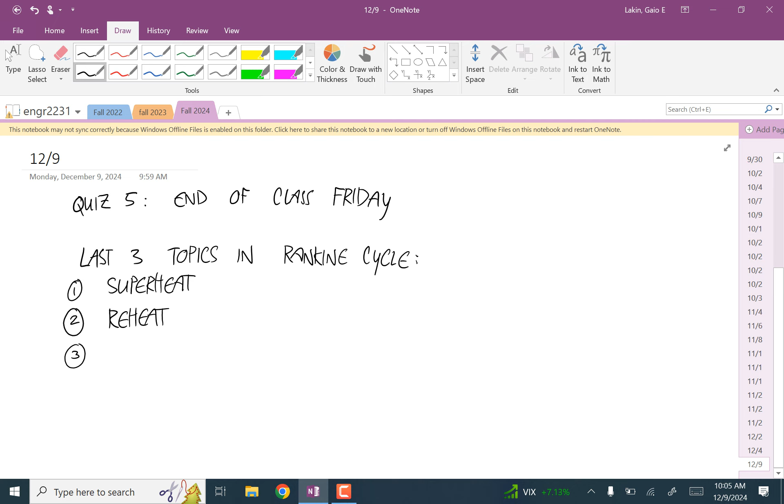Irreversibilities. So anyone remember what are the 2 things that make a process isentropic? This is kind of important. Q dot equal to 0? Yeah, so no heat transfer into or out of the system. And then the other thing is it has to be internally reversible. So this is saying those 2 processes that we think of as having no irreversibilities, how do we introduce those to make it more realistic? That's what the last one is.

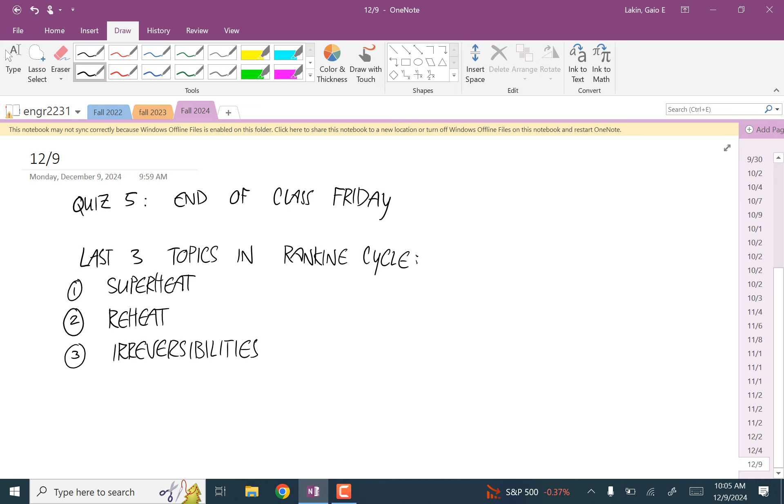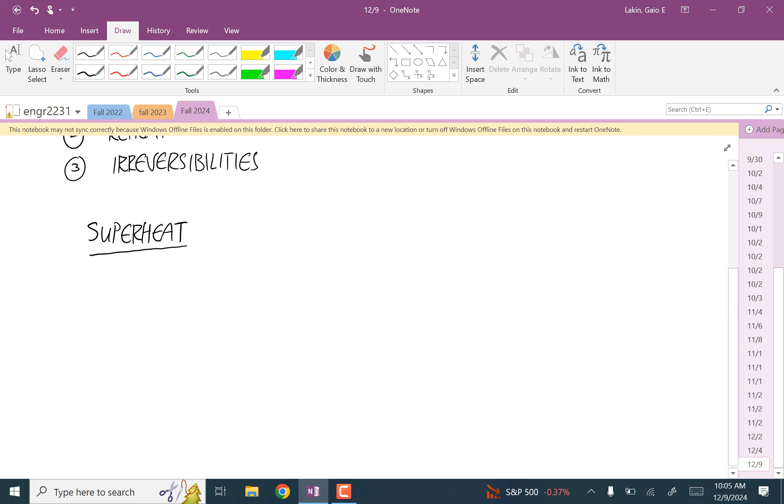Okay, so superheat. If you draw the vapor dome, we're used to state 1 being here for the ideal Rankine cycle. So we're used to it being a saturated vapor. But if you keep pumping up the temperature past that point, remember we're treating the boiler, or we're going to call it a steam generator now, as isobaric. And so if you keep increasing the temperature at that same pressure, you go from a saturated vapor and turn it into a superheated vapor. And so our state 1 is actually here now. Everything else looks the same.

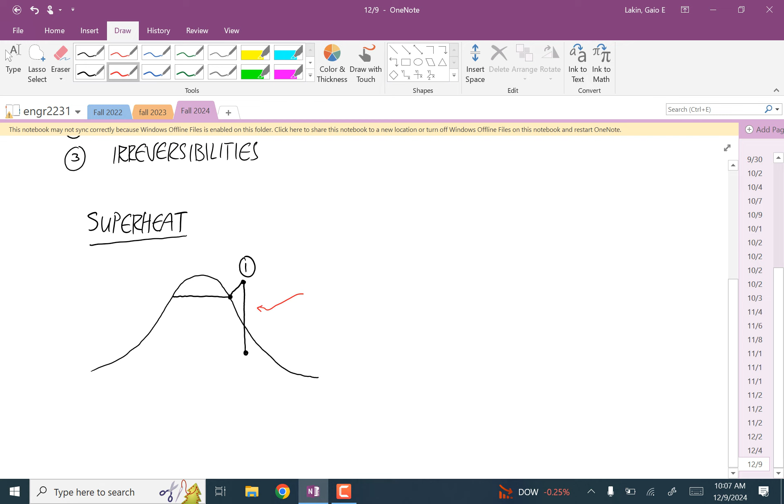We're still going to assume that this is isentropic. Our state 2 is down here. Our state 3, and between states 2 and 3 is an isobaric condenser. And then from 3 to 4 is like this, and this is an isentropic pump. And then 4 to 1 is this whole thing, and that's isobaric.

Once we get past the saturation, we call this a steam generator because the mechanics of it are a little different to get past saturated vapor.

Okay, so what's the purpose of doing this? Why would you do this? We talked about it in passing a long time ago. Because you can get a lot of energy without having to change the temperature.

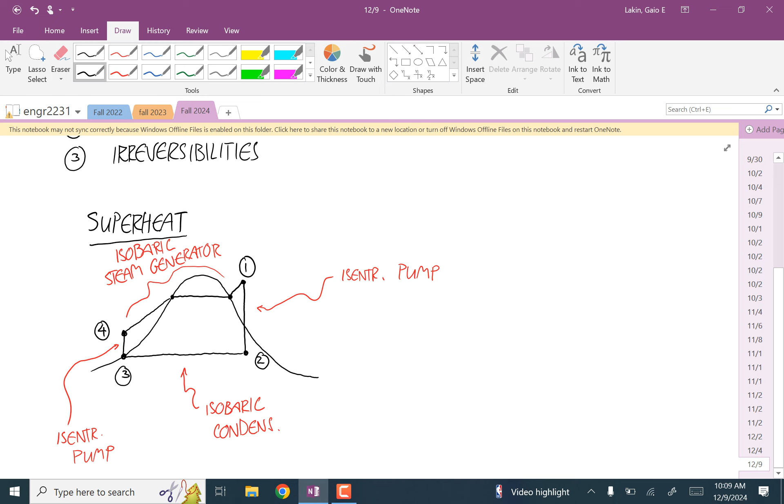That's actually what you get during this, like inside the vapor dome, that temperature, because the vertical is the temperature. But what you get, remember that when we talked about the ideal efficiency of the Rankine cycle, we saw that the higher the pressure and the higher the temperature you have going into the turbine, coming out of the steam generator, the more efficiency you get. And so that's what's happening here. You're just getting more efficiency as you go to a higher pressure and temperature.

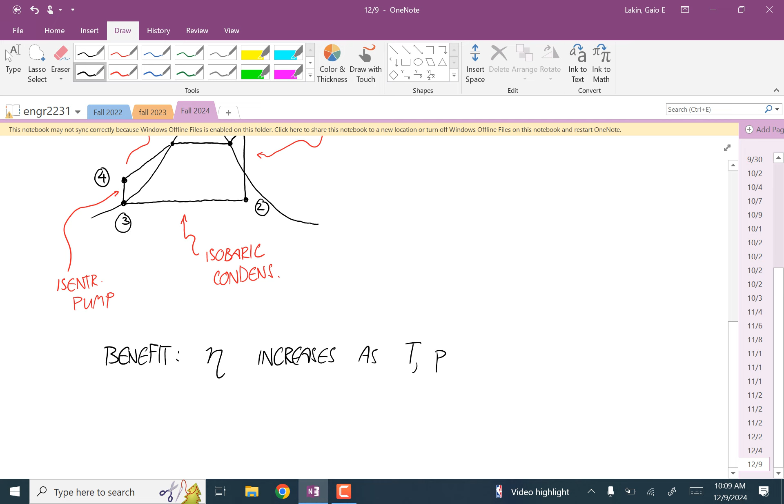So the benefit is that efficiency increases as temperature and pressure at the steam generator increase.

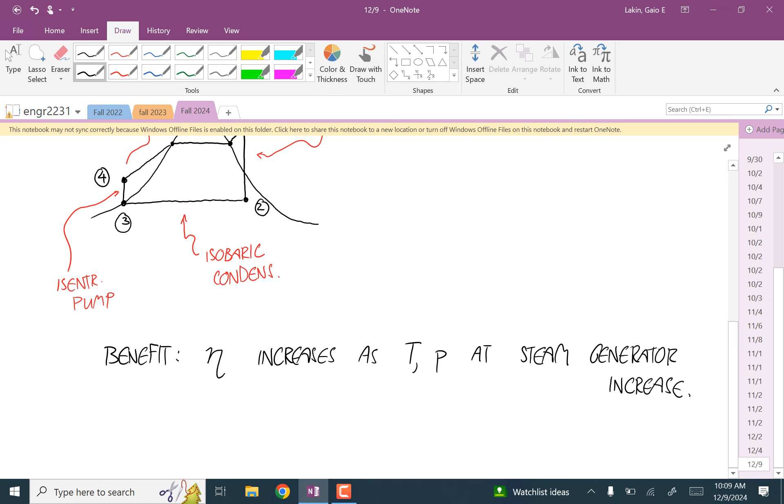Temperature and pressure? Yeah, so either one or the other, or both. Sure, so like higher enthalpy. Right or no? Higher enthalpy. So yes, I guess if you think of that as an ideal gas, that is what would happen there.

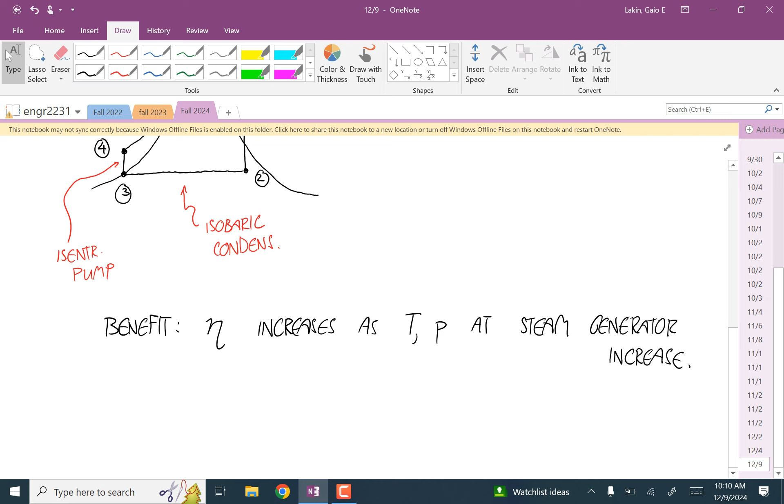Okay, and so how does the calculation change? Nothing changes in the calculation really. Because it's exchanging enthalpy for fluid speed? Is that it? Yeah, I guess what you're really doing in the turbine is exchanging... well, yeah, you're using that enthalpy and turning it into work. So you're exchanging enthalpy for W dot.

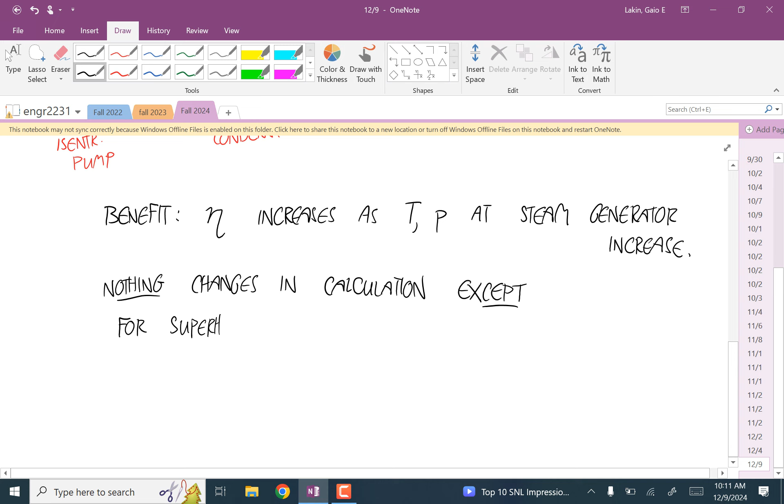Nothing changes in the calculation except now that you have a superheated vapor, now you need two properties to look up any other properties.

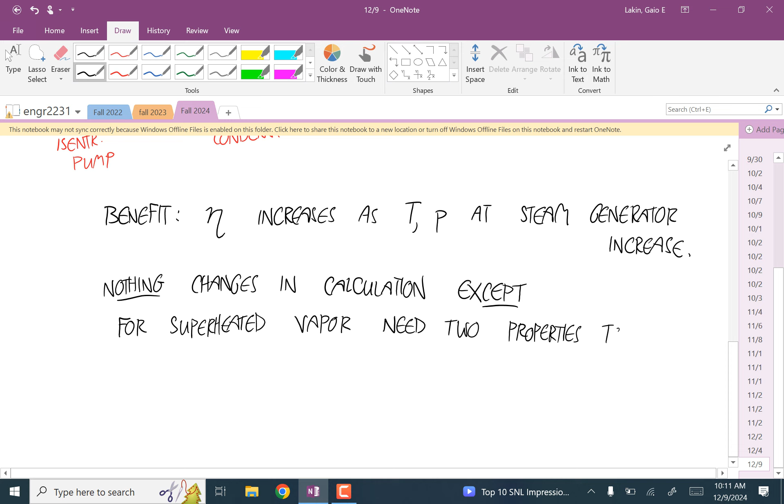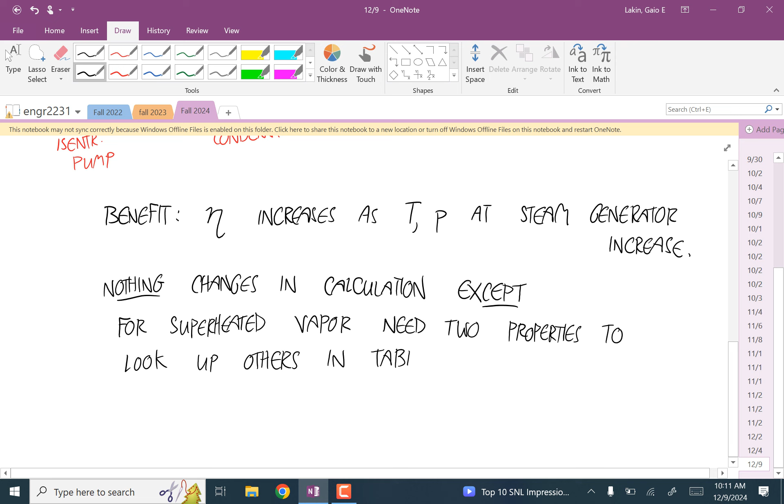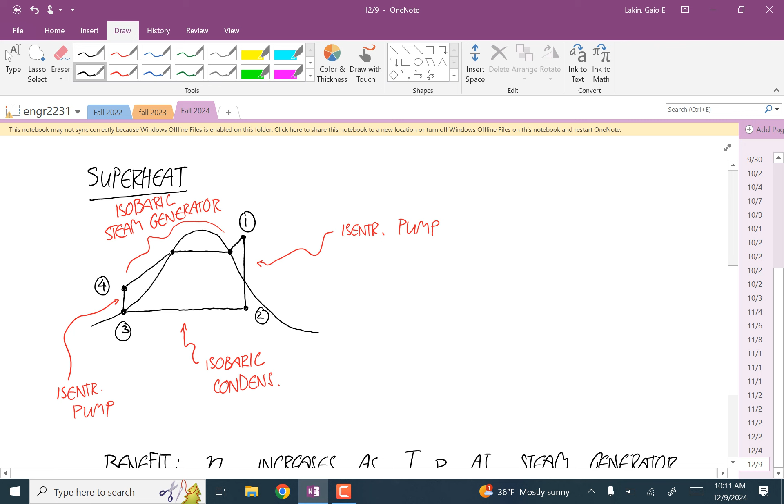So it used to be at state 1, if we had the pressure alone or the temperature alone, usually it's pressure, then that was enough to look everything up. Now at state 1, you need two things, usually pressure and temperature.

So this is at state 1. That's really the only thing that changes. Everything else about calculating efficiency and calculating the work generated at the turbine or the work required at the pump, none of that stuff changes at all. Okay.

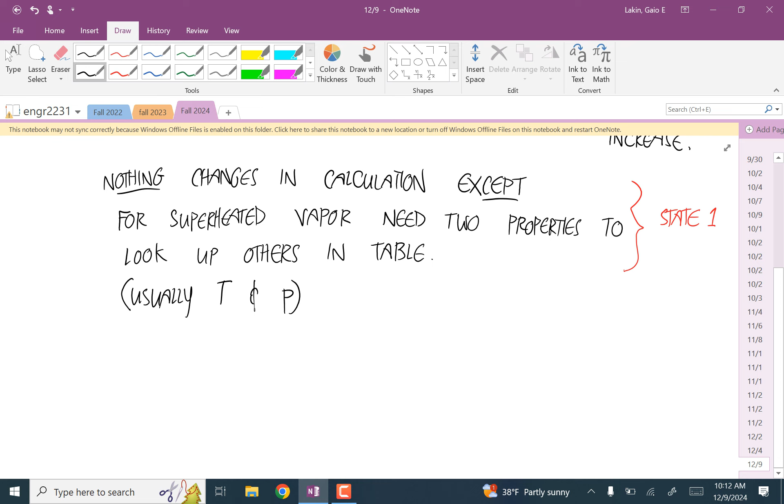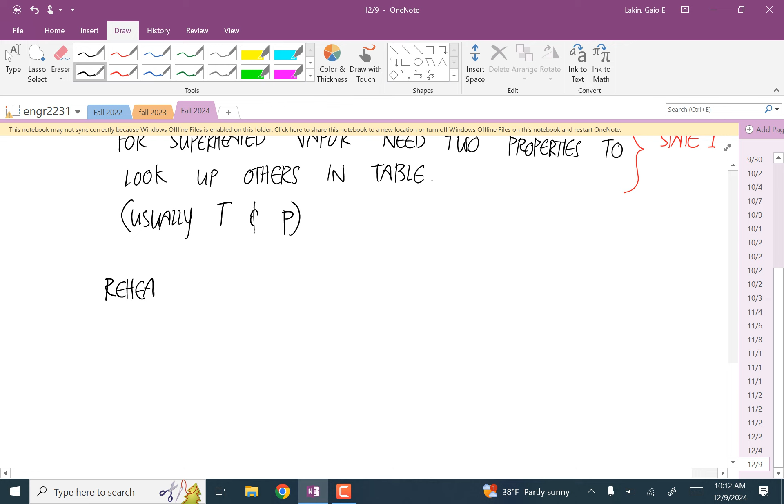And we'll get into some examples, I guess, at the end. So the second one is reheat. And the way a reheat works is, let's think of this as the isobaric steam generator.

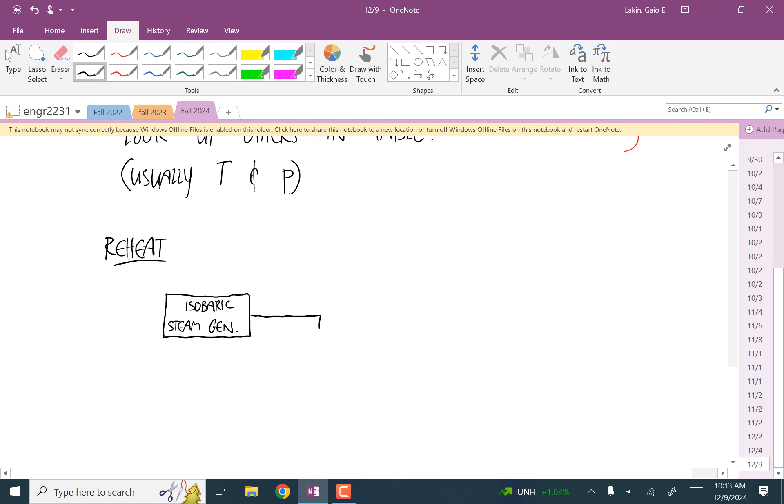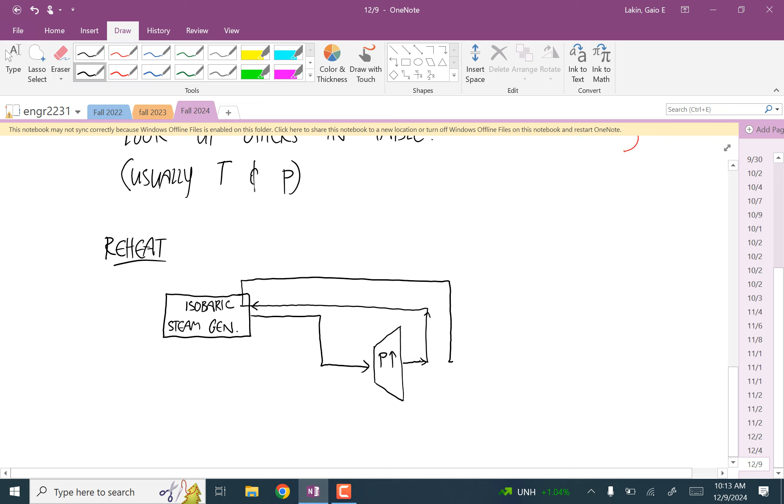And from the steam generator, the working fluid goes to a first stage turbine, and there's very high pressure in this turbine. And from there, it goes back to the steam generator, and then to a second stage turbine with a lower pressure.

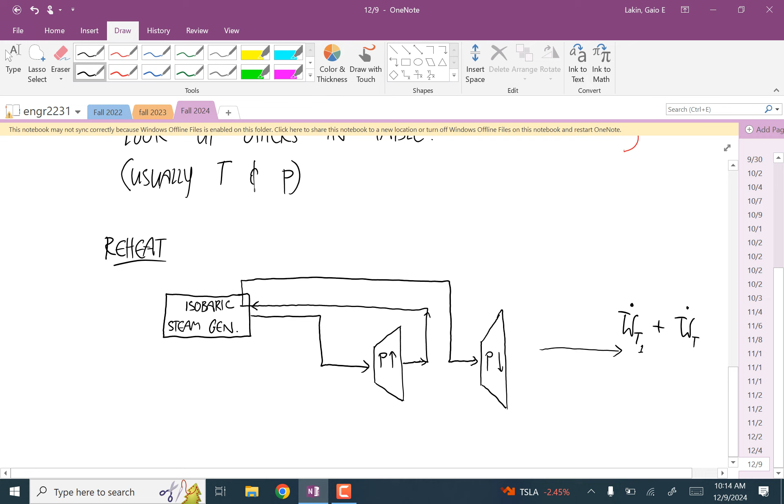And coming out of these, we have W dot for the first turbine. You can think of this as a sum of two works, and W dot for the second turbine. And then the working fluid goes back to everything that we're familiar with: it goes to the isobaric condenser, and then the pump.

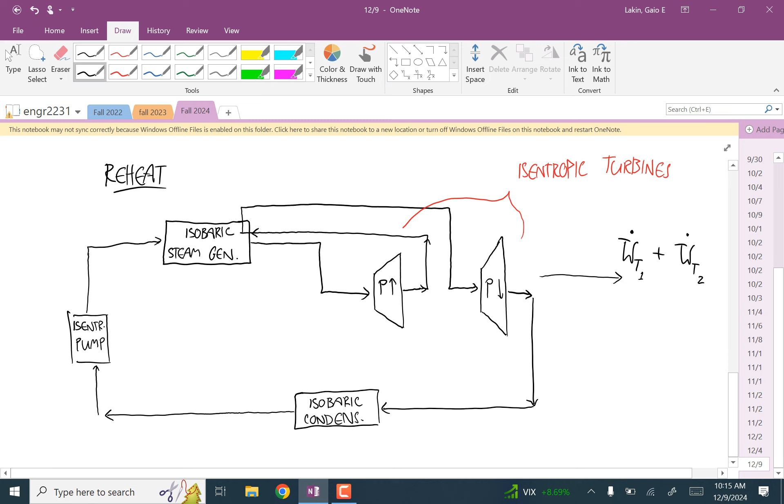I didn't write this anywhere, but these are still, we're going to assume these are isentropic. And okay, the pump then goes to the steam generator. And so on a temperature entropy diagram, it looks something like this.

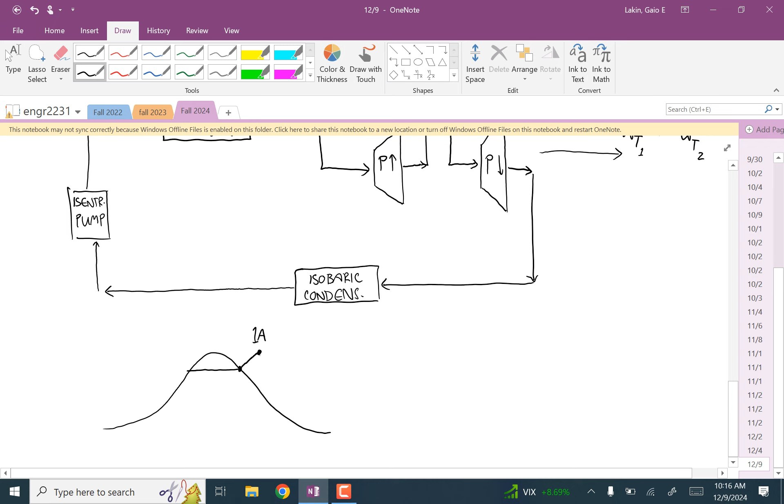So first, I'm going to call this state 1A. We have a superheated vapor. It goes through a turbine, but this time it doesn't get back to saturation in the first stage turbine. It stays as a superheated vapor. And I'll call this 2A.

Then it goes back to the steam generator. I'll call that 1B. And then this is 2B. And then it goes through the things that we're used to. So here's state 3, 4.

Okay. And it just maximizes what you can get out of the vapor. Yeah, so this is really the first one that just takes into account practical considerations instead of like mathematical considerations.

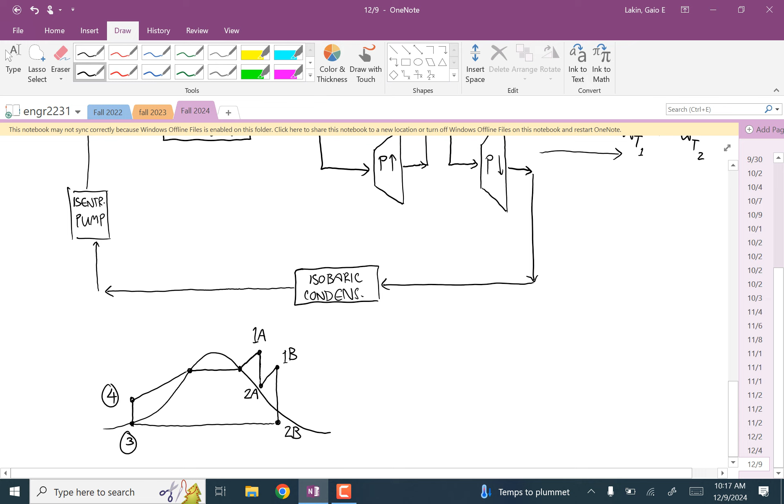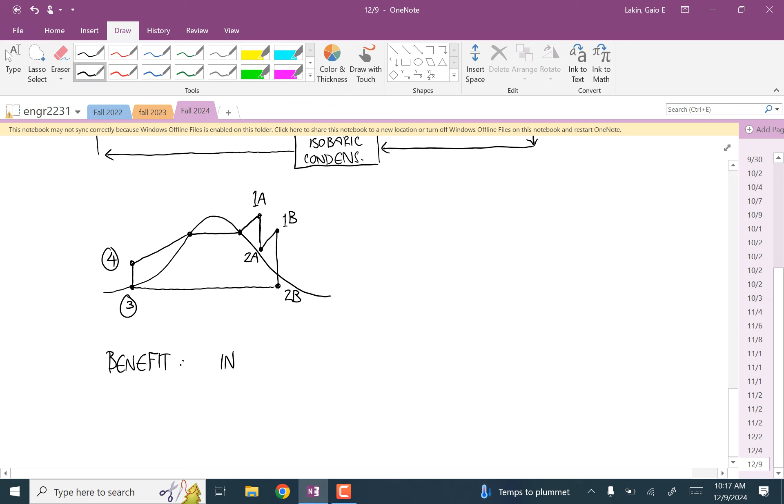The reason that they do this is because when you have—okay, so the benefit here is that in the high pressure stage 1 turbine, because the high pressure raises the boiling point, you can get a lot of liquid in your saturated mixture. So you can get a lot of liquid in the working fluid. And that's not a mathematical problem—that's just liquid damages the turbine blades.

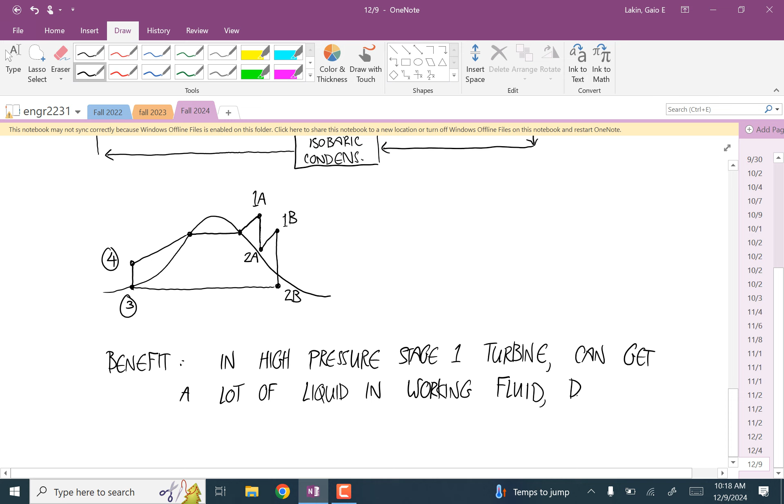And so instead, you get a little bit of energy out of the turbine. Don't let it get to that saturated mixture. Send it back to the heater and then to a lower pressure turbine. And you don't have that problem with so much liquid damaging the blades.

So in that first one, then is it almost like sacrificial a little bit? Or do you avoid getting any liquid at all throughout this whole thing? Well, yeah, you can see from where it falls on the temperature entropy diagram, there's no liquid at all after the first stage turbine. The only one is in the lower pressure turbine.

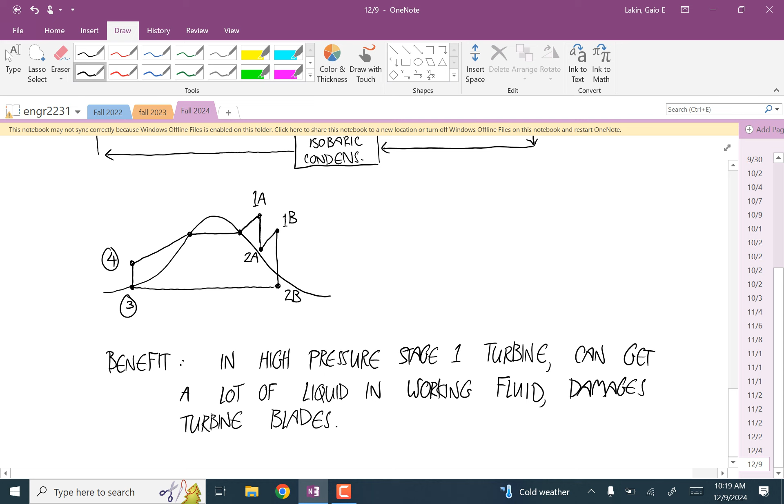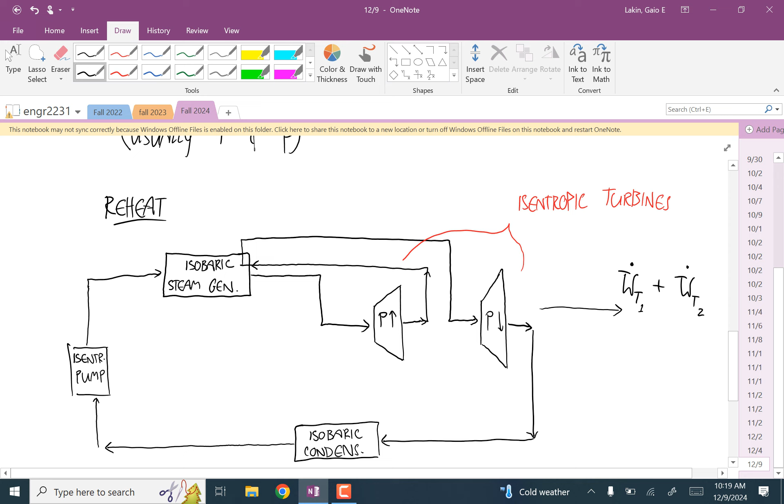So when you say in high pressure stage 1 turbine, you mean when there's just one? Well, in this case, what I wrote here is that the first stage turbine is at a really high pressure, and the second stage is a lower pressure. Does that always mean less work? If you have—I suppose, I don't know if I would say always, but if it comes in with lower enthalpy, then there's less ability to produce work. So I would think typically that would be the case, yeah.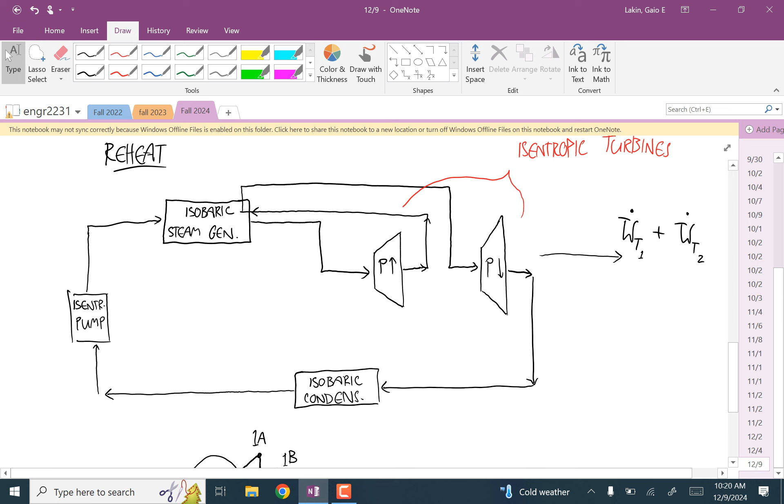Okay, so notice as far as the processes here, the process that goes from 1A to 2A, and the process that goes from 1B to 2B are isentropic turbines. And then the steam generator is the one that's a little screwy with the numbering: 4 to 1A, we're used to that being the boiler, but also 2A to 1B is also this steam generator. So these are both isobaric steam generators.

And the pressure is not the same in these two. Like in each of these two processes, you have the same pressure, but you don't have the same pressure between these two, you know what I mean? It's not going back into the same steam generator, it's going back into a different section of the same thing.

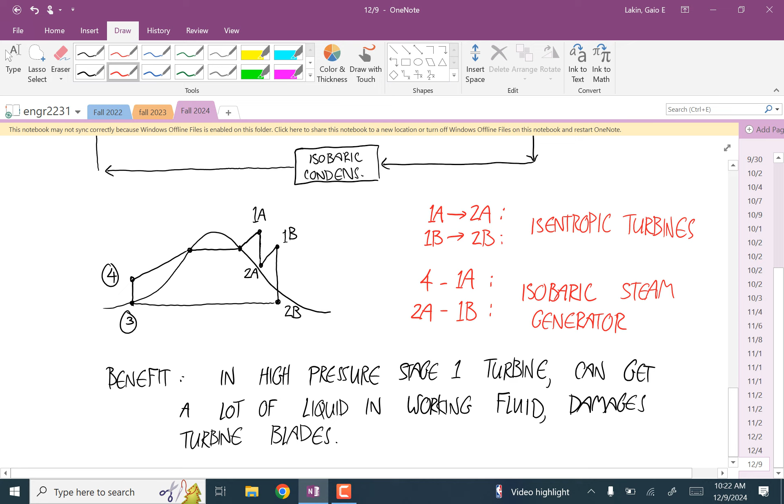So then this just adds more columns to our... Yeah, right, you're exactly right. It increases the ugliness, kind of, of that efficiency calculation.

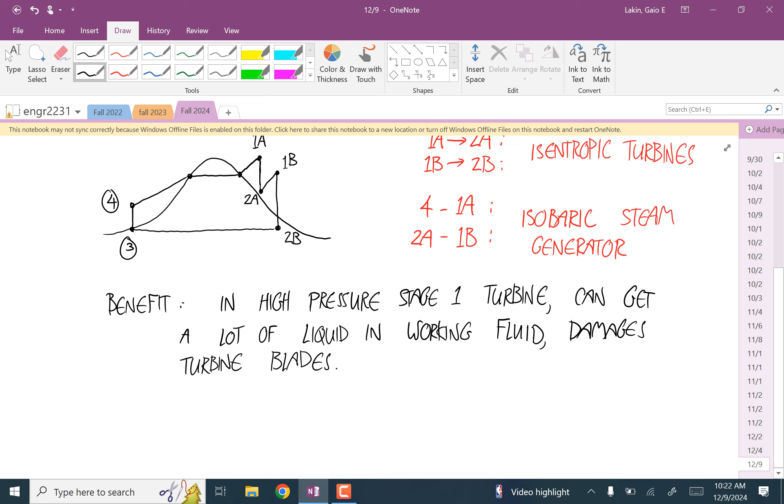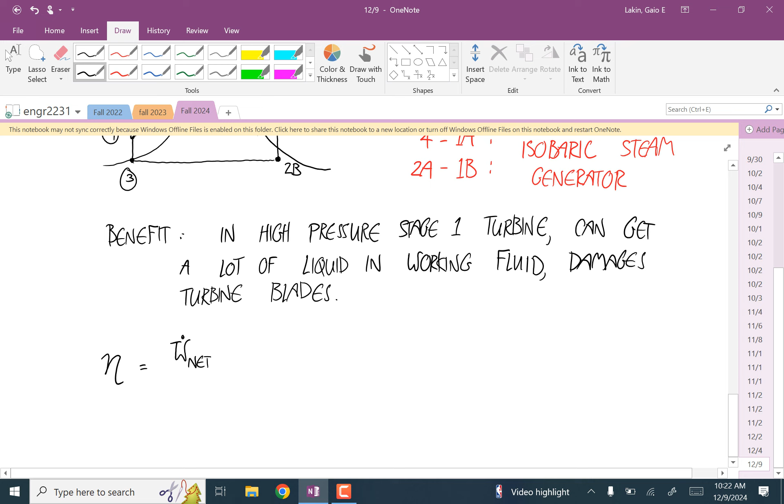So the efficiency in the reheat cycle, well, it's still W dot net over M dot divided by Q, I guess I'm still calling it Q sub B for the boiler, even though it's really called a steam generator now, over M dot.

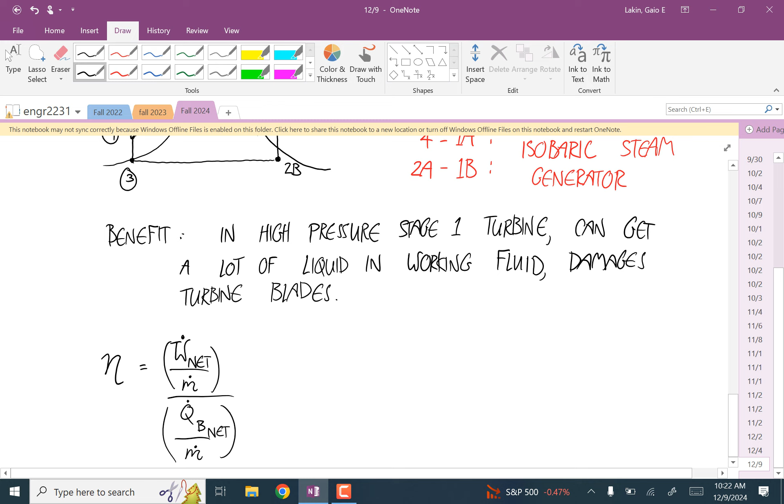Wait, wouldn't those M dots cancel? Yeah, so this is just the way, but remember that coming from the control volume first law, it's just easy to get stuff in terms of works and heats per M dot. And so, yes, since it's all steady state and everything, this is the same as saying we're calculating W divided by Q.

And we can write this as W dot for turbine 1 over M dot, plus W dot for turbine 2 over M dot, minus W dot for the pump over M dot. So that's the net work.

And then for the heat, now we have the two different places where we're adding heat to the working fluid. So we're dividing by Q dot B1 over M dot, plus Q dot B2 over M dot.

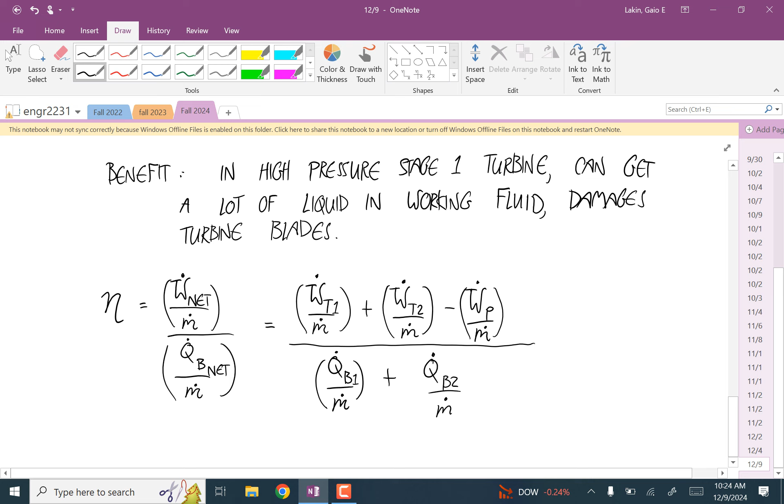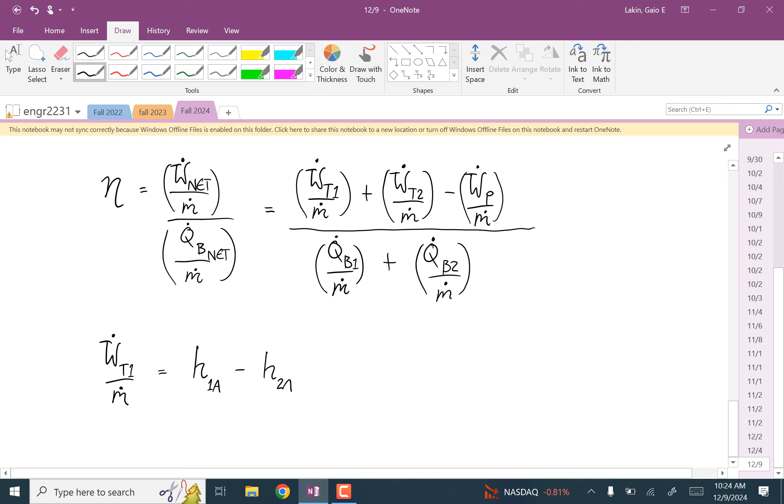And to calculate these, we have that W dot for turbine 1 over M dot, this all comes from that control volume's first law, is equal to specific enthalpy at state 1A minus the specific enthalpy at state 2A. Then W dot for the second turbine over M dot is equal to H1B minus H2B.

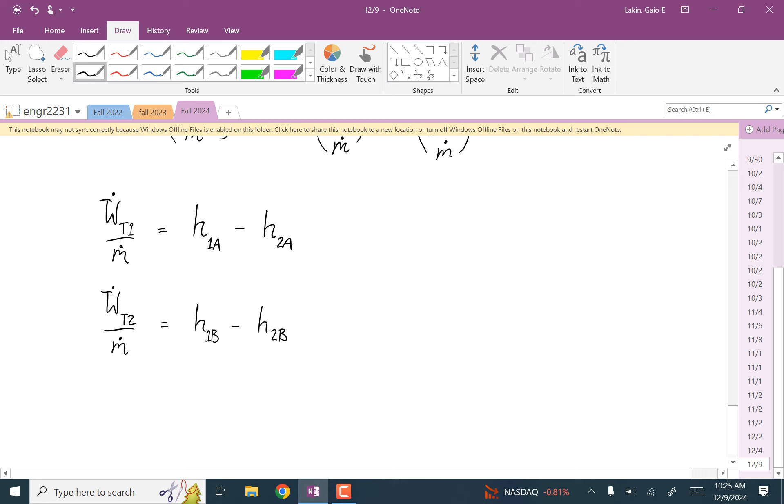I didn't write down the heat coming out at the condenser, but let's see. That is, so Q dot over M dot at the condenser is equal to H2B minus H3.

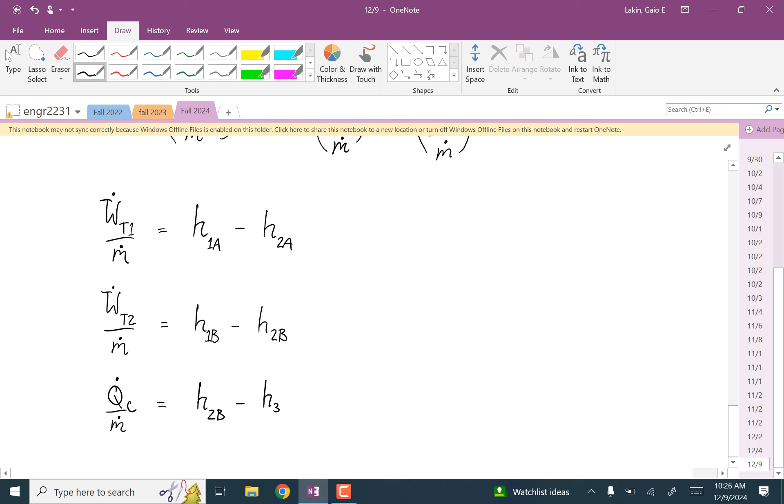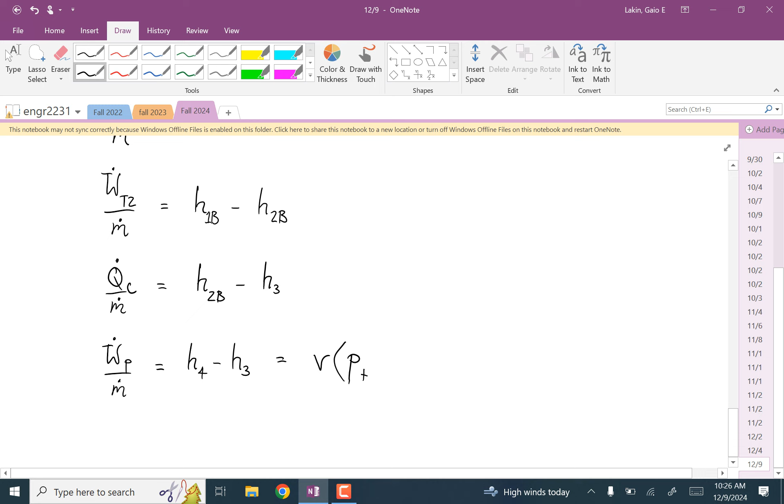Then we have the pump, and this is incompressible, so we have the two ways of calculating the work that's required at the pump. So W dot for the pump over M dot is equal to H4 minus H3. And we can write that as specific volume at either one of these two, because it's incompressible, times the quantity pressure at 4 minus pressure at 3. So we have the two ways of doing this because it's incompressible.

And then at the boiler, at the steam generator, we have two of these. So QB1 dot over M dot is H1A minus H4. And for the second time through the steam generator, Q dot B2 over M dot is H1B minus H2A.

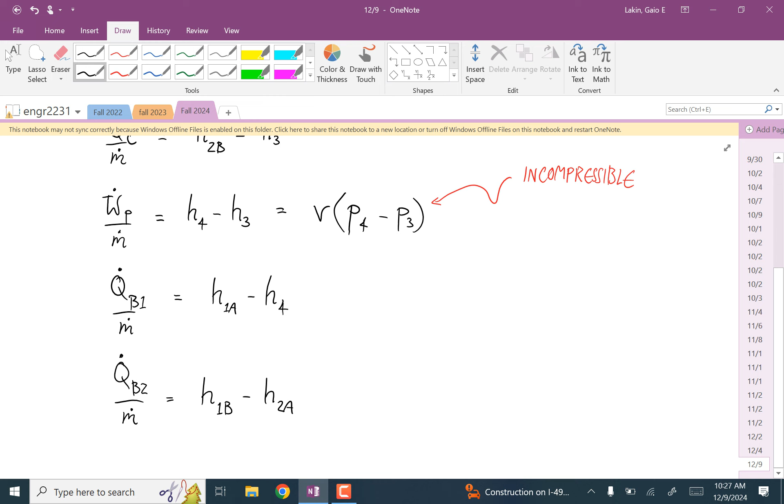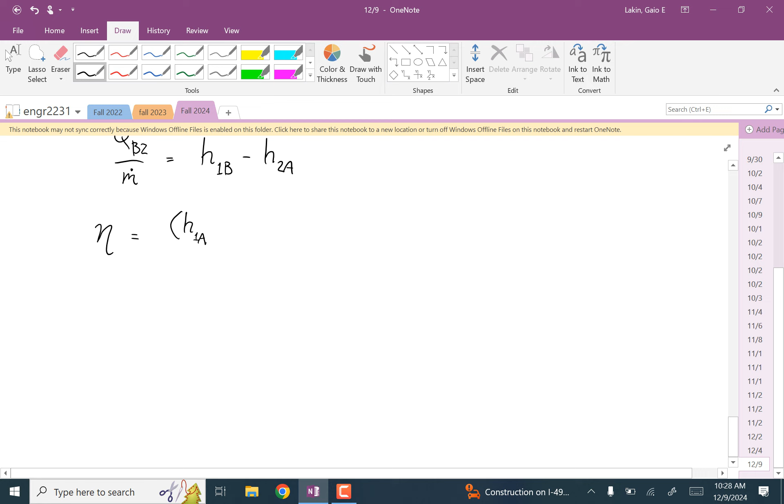And so if you put all this stuff into this expression for the efficiency, you get that the efficiency is equal to H1A minus H2A, plus the quantity H1B minus H2B, minus the quantity H4 minus H3, all divided by H1A minus H4, plus H1B minus H2A.

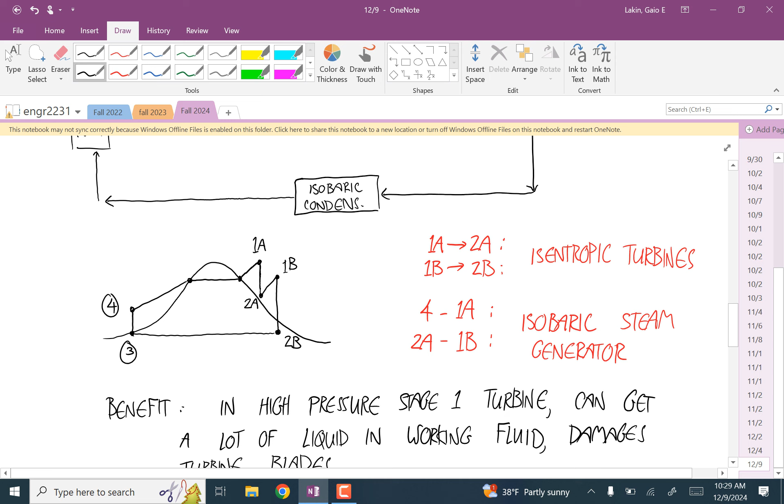Okay, so it all gets messier to look at, but the way you go about it is the same. You're just using the information you have to find the enthalpies at all of these different states. Now you have to do it at 1, 2, 3, 4, 5, 6 states instead of 4. And then once you have all those enthalpies, using the tables or whatever you have to do to get them, then you can calculate the efficiency and whatever else.

There's no clever cancellation in here. No. Yeah, I suppose because it's all added. Yeah, the denominator is too complicated, I guess, to make those cancellations.

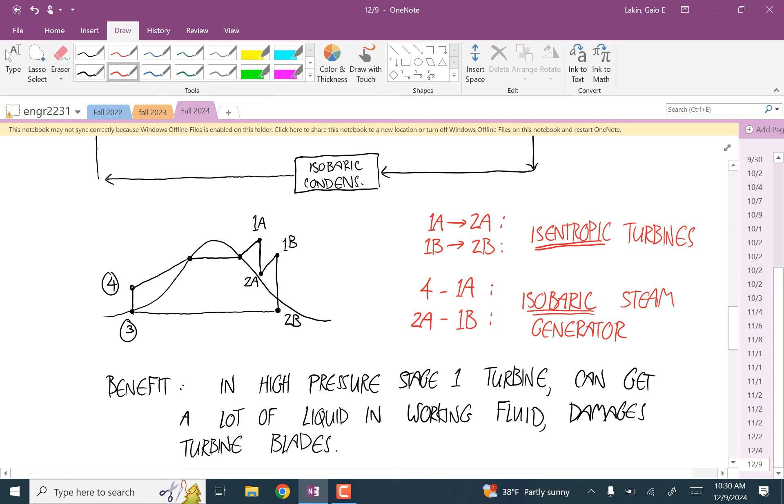But you're still going to use the fact that the two turbine processes are isentropic, and both of the two steam generator parts and the condenser are isobaric. So this is still isobaric, and this is still isentropic.

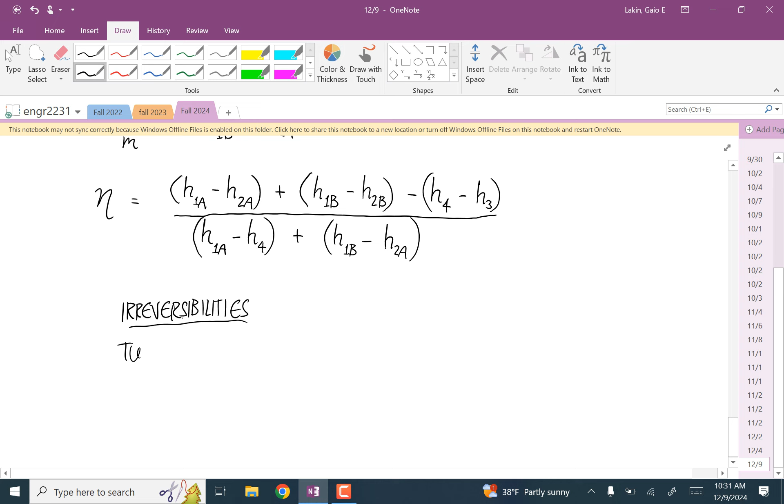Okay, and now the last thing that we'll have to do is introduce irreversibilities into these processes. So remember that the turbines and the pump are, so far, treated as isentropic. That means no heat transfer, and no irreversibilities.

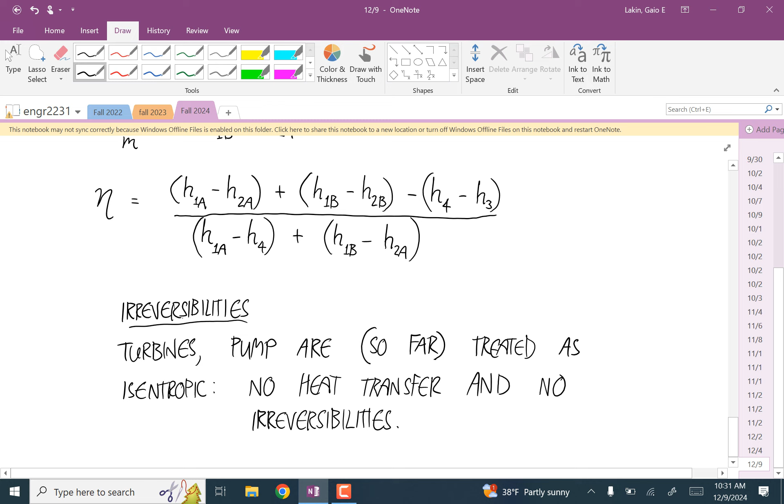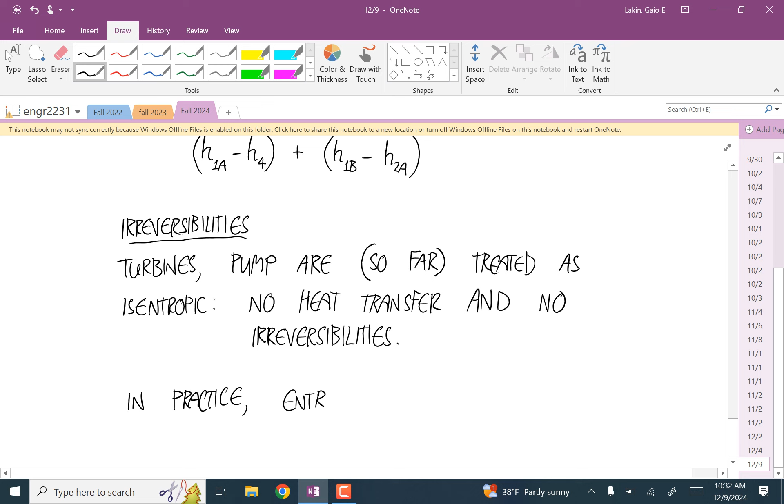But of course, in reality, in practice, entropy is added in both of those two processes. Let's call it generated. So entropy is generated in the turbines and the pump.

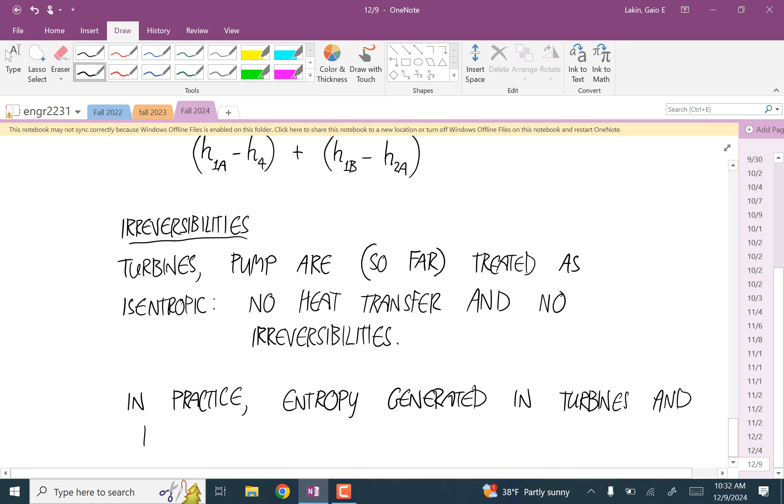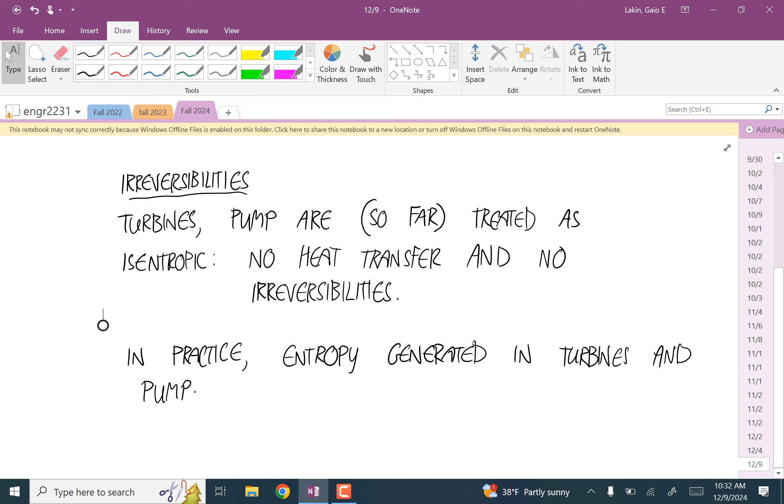Okay, so what does it look like on the temperature entropy diagram? I'm going to go back to starting with the ideal case, but all of this stuff that we just talked about with the superheating and reheating, we can use this same idea to introduce irreversibilities into those. But so, okay, let's first think about the ideal Rankine cycle.

But now we're going to acknowledge that some of this is wishful thinking. And so we're going to say that...

Let's label what we know here. So this is our state 1. But instead of calling this one our state 2, we're going to call it state 2s. So this is like the state 2 if it was isentropic, okay?

If S was constant. The real one, well, if we're generating entropy, then the real one - remember the horizontal axis is entropy, okay? And so this has to be really somewhere over here. And so this is our real state 2.

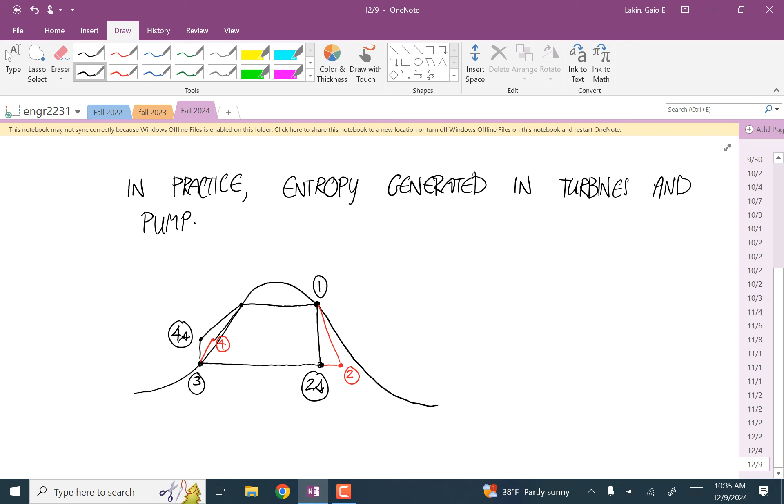And then we're going to go from there to here. And so what we're going to use is just a simple equation that lets us go from the 2s and the 4s to the 2 and the 4. So we're going to introduce this idea of isentropic efficiency.

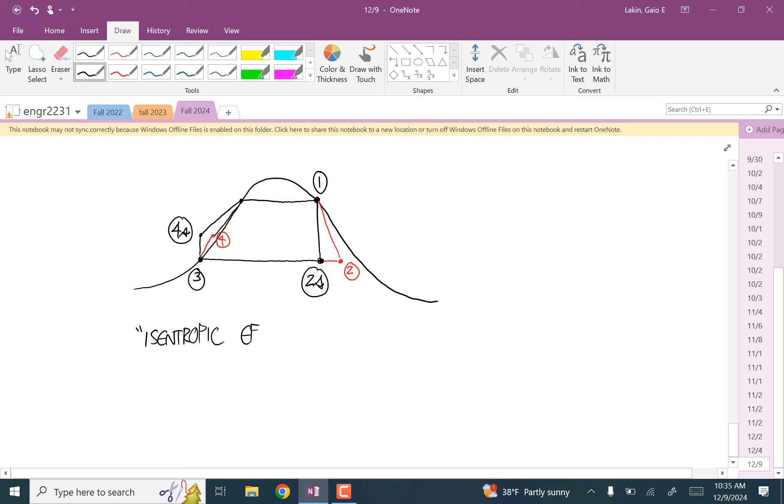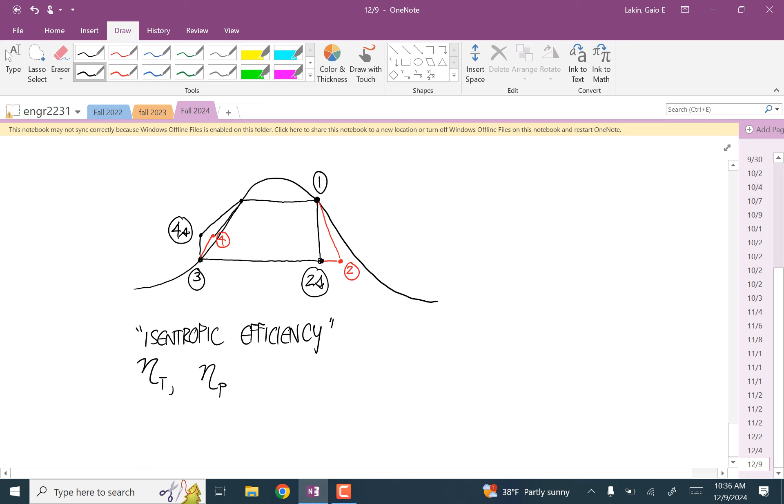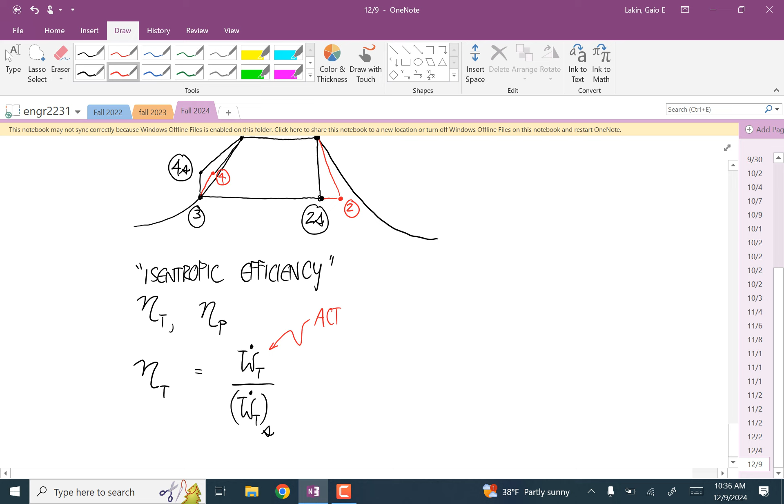And we're going to do it separately for the turbines and the pumps. And the definition of this is: for the turbine, the isentropic efficiency is the work rate at the actual turbine divided by the work rate at the turbine assuming isentropic. So this is the actual, and this is if it was isentropic.

And since we have expressions for these in terms of enthalpies, we can write this as H1 minus H2 over H1 minus H2S.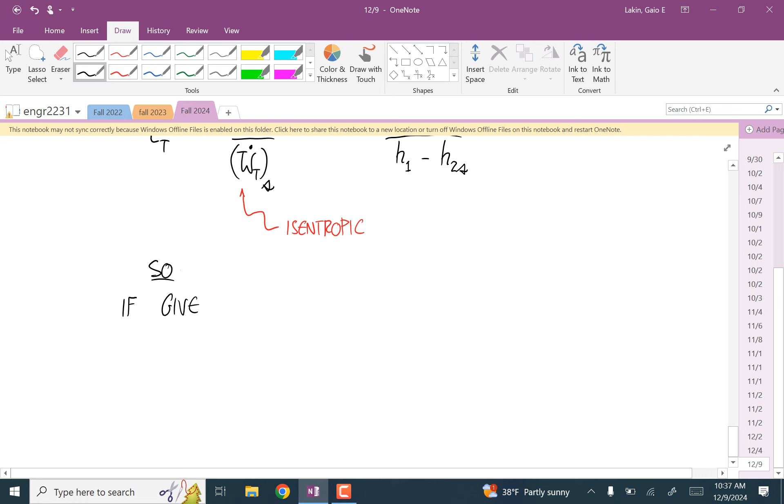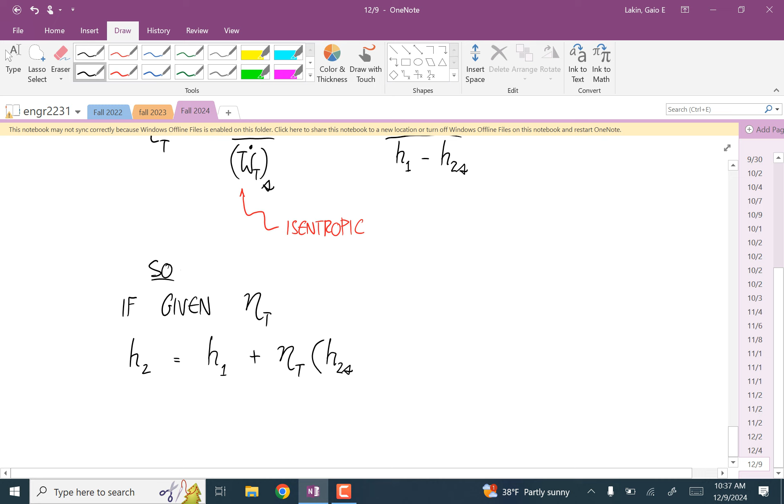So if we're given the isentropic efficiency, and that's just how these problems are going to be - assume an 85% or whatever isentropic efficiency - then we can say the real enthalpy at state 2 is equal to the enthalpy at state 1 plus the isentropic efficiency times the quantity H2S minus H1. So notice all this is doing is just rearranging that definition of the isentropic efficiency.

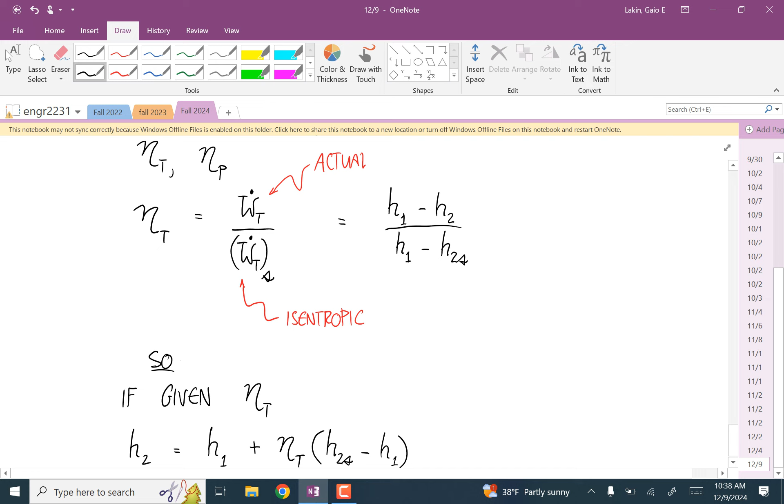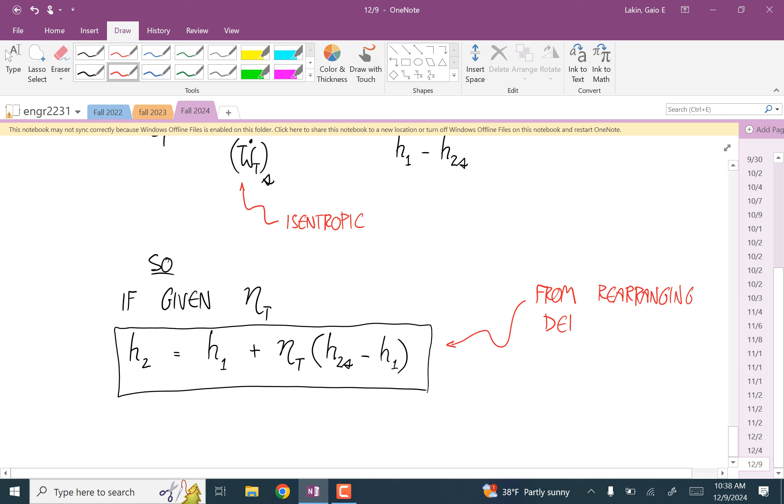So this is just from rearranging the definition of the isentropic efficiency for the turbine.

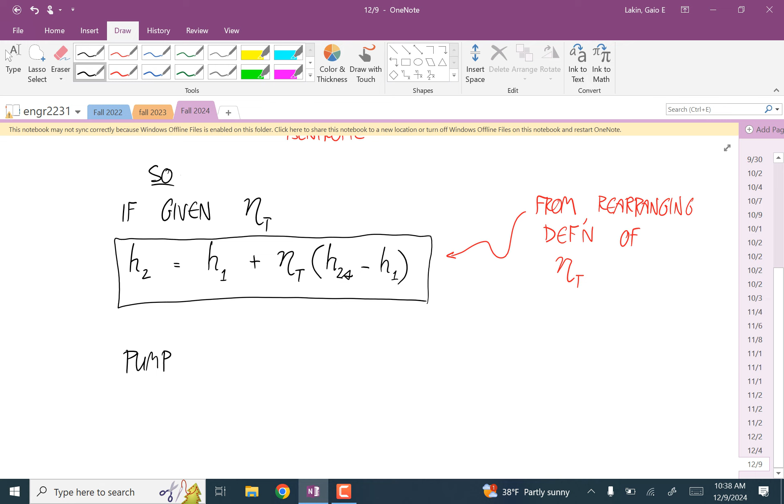And it's the same thing for the pump, except in this case we're going to flip - we're going to take the reciprocal of that fraction. Because in this case, you know, the isentropic efficiency of the pump would be - now we're talking about work that's required, okay? And so the smaller of these two works is going to be the one when you have perfect efficiency, and the bigger... so to keep this thing less than 1, we're just going to take the reciprocal.

So it's going to be the work required by the pump in the ideal case divided by W dot for the real case. So this is ideal, this is the smaller one. This is the actual, and this is the bigger work.

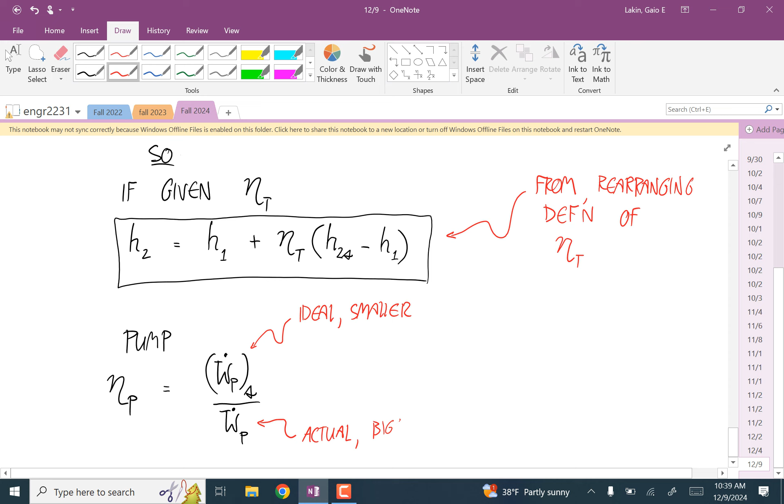And actually, let me go up here and just make a note that when we were talking about the turbine, this one in the numerator is the smaller one, even though in this case it's the actual, and the denominator is the larger. So perfect efficiency is when this thing is at 1. Less than perfect efficiency is when that's less than 1.

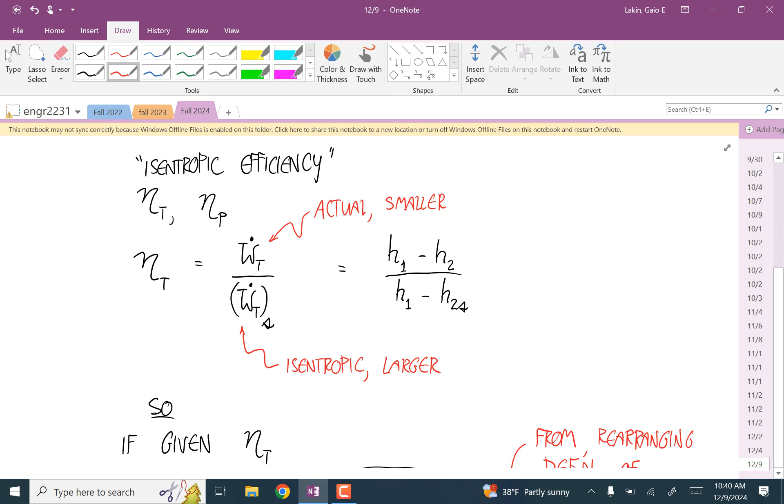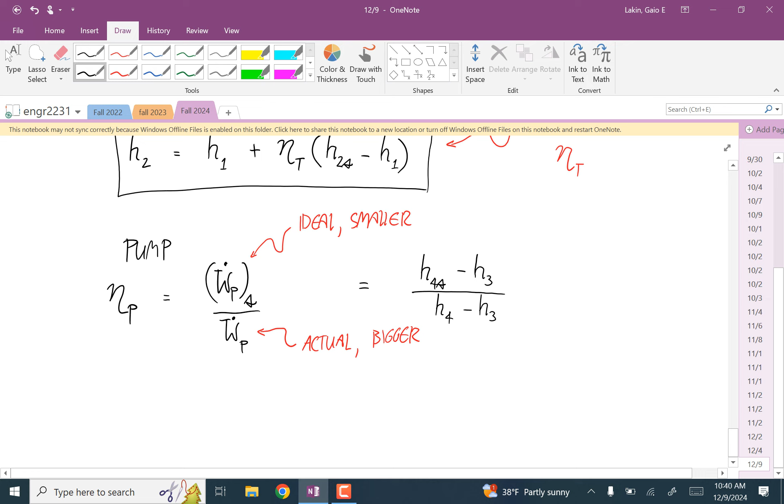Makes sense that way. And we can use these definitions and rewrite this as H4S minus H3 divided by H4 minus H3. So remember, don't confuse - one of those has actual in the numerator, one has actual in the denominator, and it's pretty easy to make sense out of which one is which if you just think it through for a second.

And we can also, because this is incompressible, write this as V times the quantity P4S minus P3 divided by V times the quantity P4 minus P3. Those specific volumes are the same, and so you can write this as P4 for the ideal case minus P3, divided by P4 for the actual case minus P3. This is because it's incompressible.

So there's never vapor going through the pump, right.

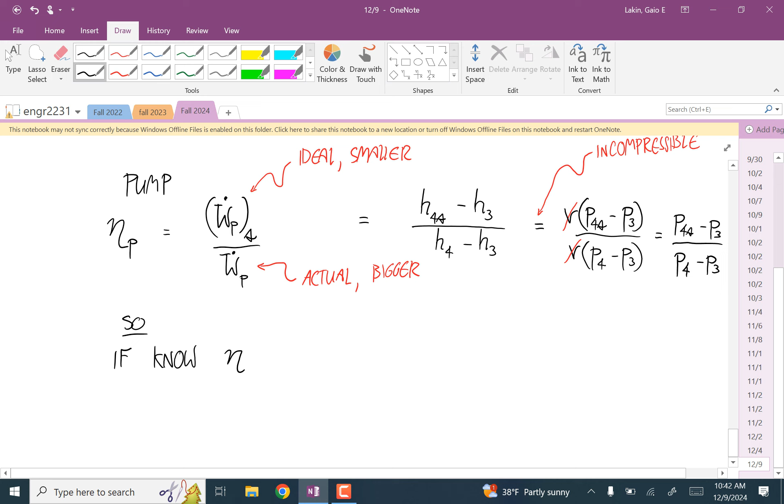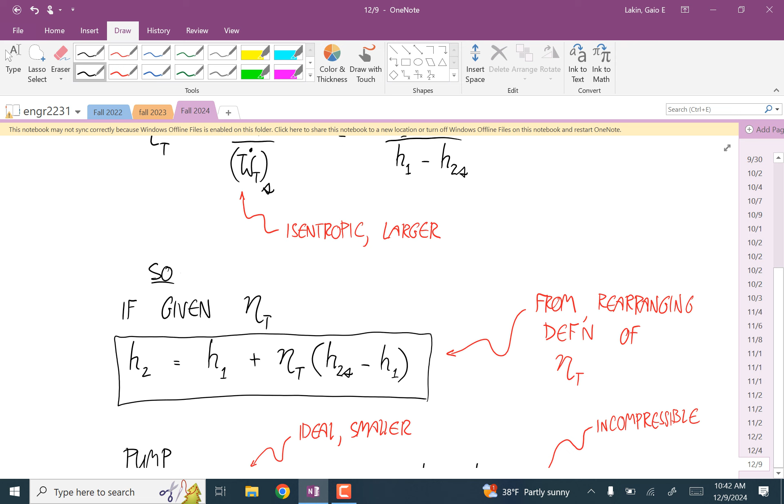So if you know the isentropic efficiency at the pump - remember with the turbine, we were able to use that to calculate H2 - for this, we're able to calculate our choice of things, whether we want H4 or whether we want P4, the pressure at state 4, okay.

So we can calculate H4 as 1 over - again, we're just rearranging - and you end up with 1 over that efficiency times the quantity H4S minus H3, plus H3.

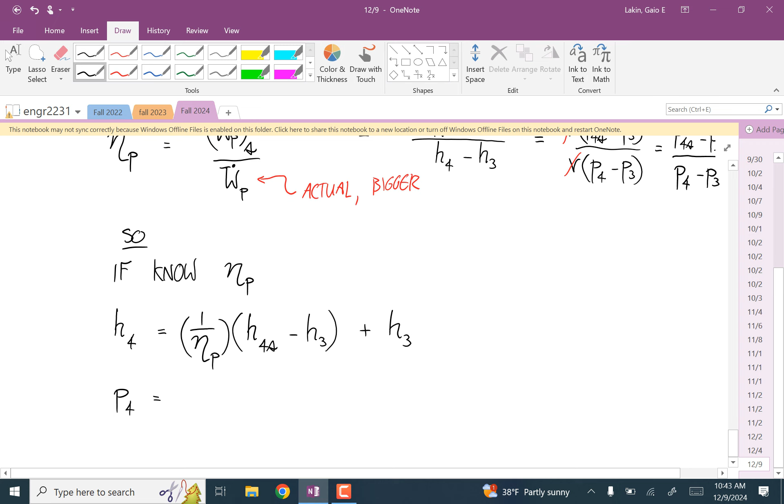You can do that with the pressures too, yeah, just rearranging the other equation I gave you. So P4 is equal to 1 over the efficiency times the quantity P4S minus P3, plus P3.

Okay, any questions about that?